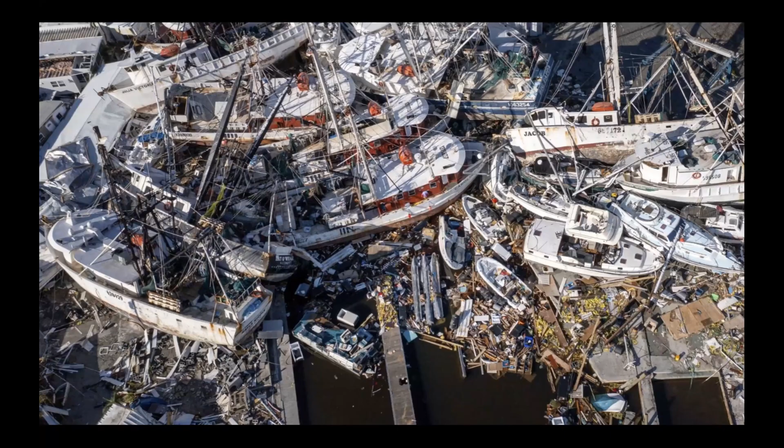If this moment were not so fraught, we might say it's ironic that the age of information coincides with the age of post-truth. Today, we feel politically more and more divided, and we've collectively witnessed the fragility of our institutions, the fragility of democracy, alongside the resiliency of violence and hate. We've also seen the erosion of women's rights nationally and human rights internationally. And in this deep social, economic, and political set of questions of our time, we're also in the midst of a climate catastrophe.

So the planet is so fragile and vulnerable. It's burning quite literally, and especially you are all aware in this area. So what can we as designers do amidst these daunting layered challenges? I think of architects as stewards of the built environment. And so we're asking ourselves as architects, how do we have agency? How do we collectively take action to build a better world?

So this is Charles and Ray Eames, and they were once asked to define design. And Charles responded in a Q&A when asked, is design an expression of art? He responded, no, it's an expression of purpose. When asked if design was a method of expression, he actually responded, no, it's a method of action. And when asked, what are the boundaries of design? He asked back, what are the boundaries of problems?

So purpose, action, problems, and we have a lot of problems. So this is the kind of multi-layered, complex context, maybe often referred to as our contemporary wicked problems. So how can we reimagine architecture, both in education and practice, to prepare us for the future world? And so I'm going to use this lens of purpose, action, and problems to begin to think through this.

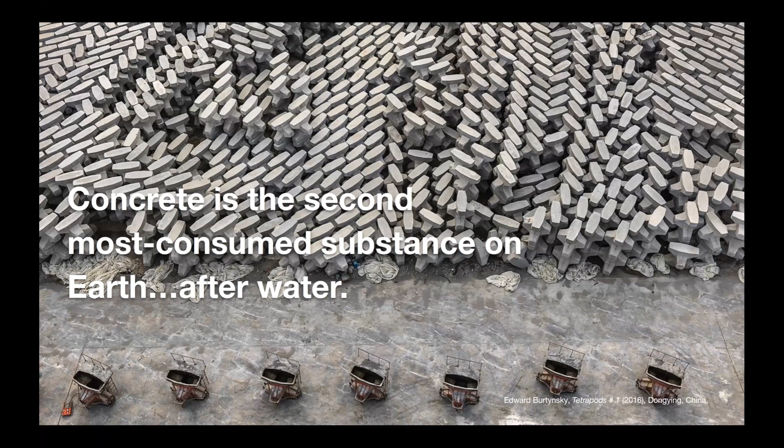So materials, right? We know architecture is highly material intensive and labor intensive. And if you look at the material spectrum, and you think of the volume of materials consumed, concrete is the second most consumed substance on Earth after water. It's also the most environmentally problematic of our building materials, but nothing has been able to replace concrete for foundations and other forms of construction.

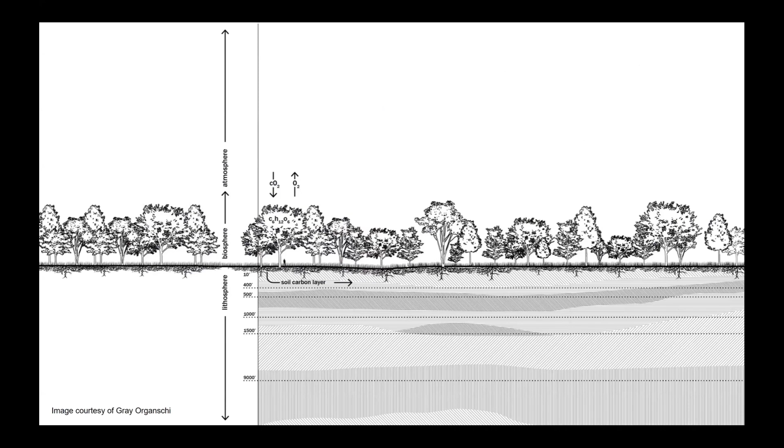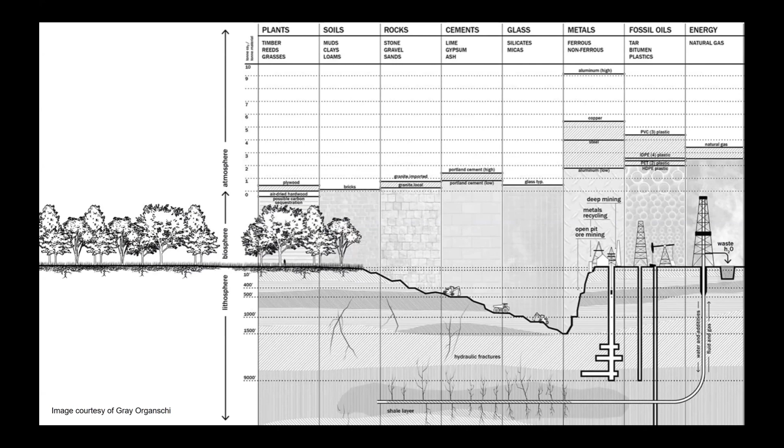especially with sustainable forestry practices. So we were asked to do a small installation at a site in Spokane, Washington. And one of the interesting things about this riverfront park was that it was the site of the World Expo in '74. And it was the first World Expo that really put forward the environmental awareness that was emerging in the late '60s and '70s.

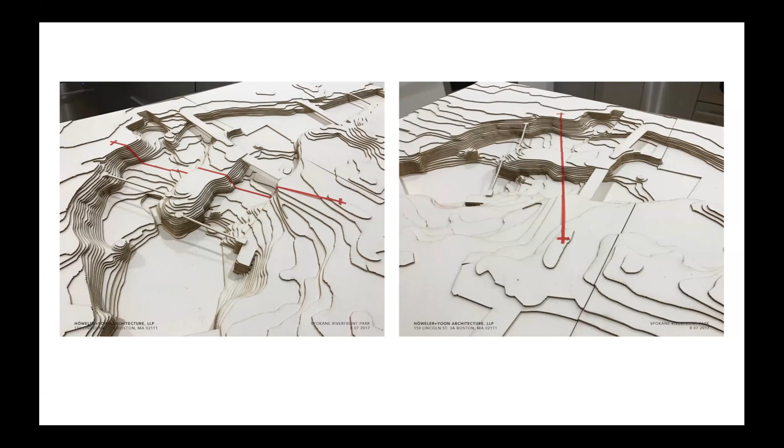So our project was simply to create a pavilion of sorts, interactive sculpture, and we used it as an opportunity to learn about mass timber. When we think about mass timber, we think about CLT and the industrial process of making cross-laminated timber panels, et cetera. But we really wanted to deal with the mass of mass timber.

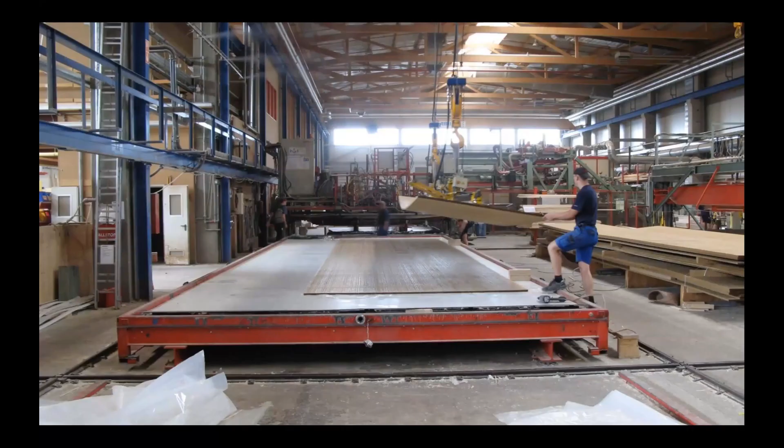So here you can see the woodworking history and legacy of the Pacific Northwest, and contemporary manufacturing with timber through these much more industrialized processes where things are in sheets. So we were thinking, where is the form, or what are the possibilities of the form of the mass timber? Thinking of it both from an analog perspective as well as from a robotic perspective.

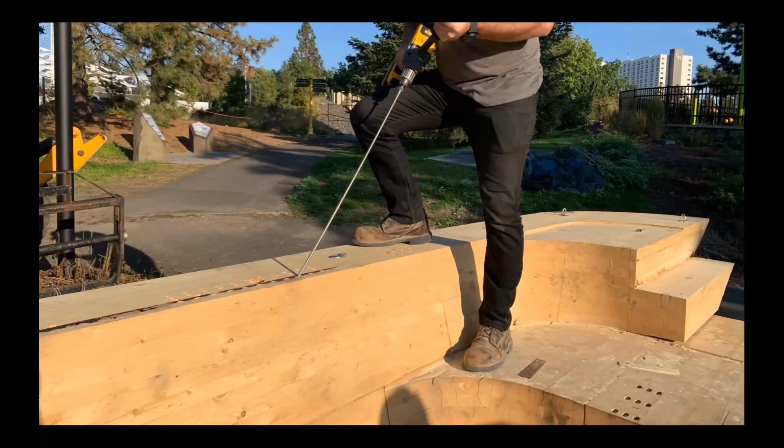And we designed a pavilion that could be simply a place to shelter one in public space that you would sit within and then get a view of this beautiful park. The screws are 23 inches long that go between the essentially glue laminated timber.

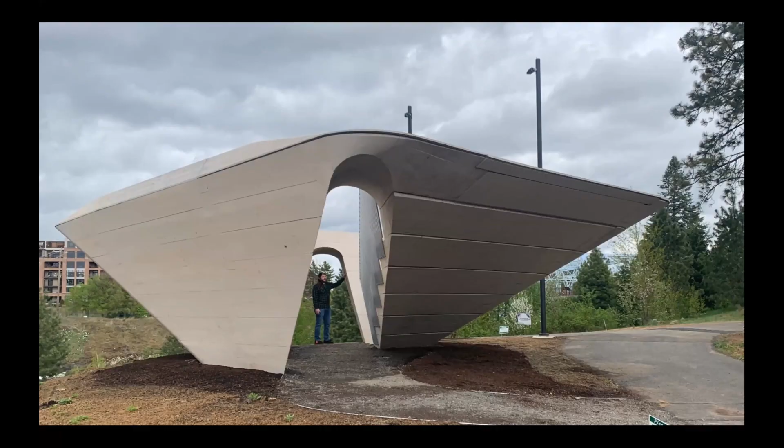And this is the structure, and we're testing the cantilever capacities of the wood, and also exploring the real beautiful qualities of the wood, like the checking, the things that everyone's always worried about, embracing that aspect of the wood. And so this just opened 3 days ago, and so I was there and enjoying watching people climbing the project.

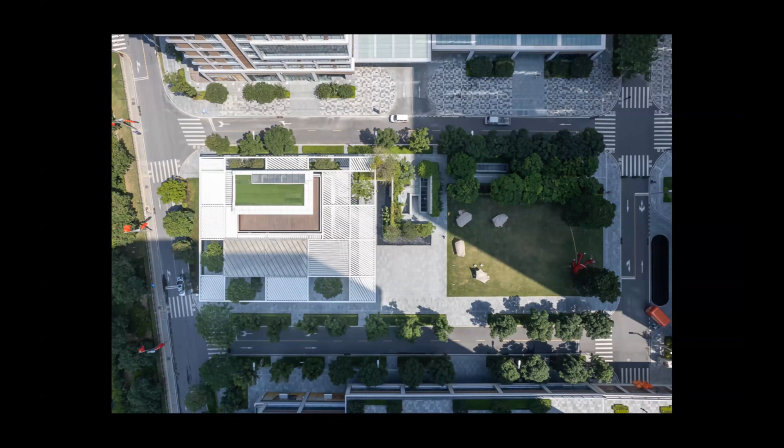So we've been thinking about materials in terms of the embodied carbon, right? So materials as a carbon sink. And so there's a focus now really on embodied energy; I would say we're coming out of a legacy that has been very focused on operational energy. So this is also a pavilion in a park, but a much more urban park.

It is located in Shenzhen, which is a very hot, humid climate. So you can see LA, Shenzhen, and Phoenix. And one of the ways that we wanted to create a public space and public amenity in this very hot urban context is by creating shade.

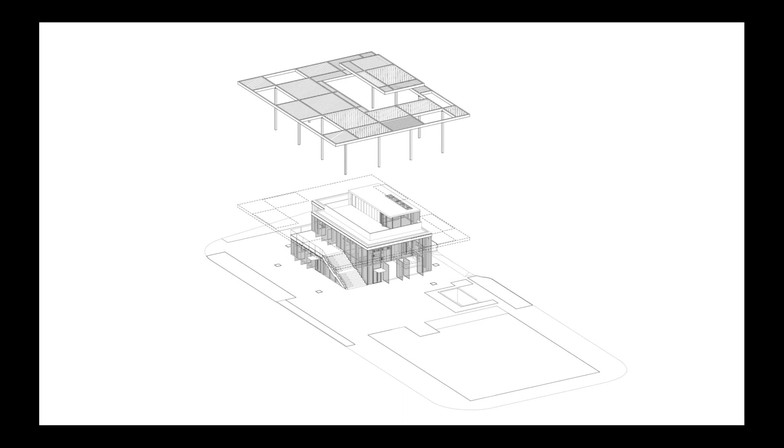So the concept of the project, because they wanted the pavilion structure to be very glassy in order to have transparency, so people were not afraid of using it, essentially a glass box. We decided that we would basically create this big shaded roof that would shade the glass box program.

But in looking at how to self-shade this building, one of the things we wanted to explore was, how do we design these louvers? One of our precedents was this beautiful building by Fisac, the Hydrographic Studies Center in Madrid, with these incredibly shaped louvers that really control light and bring in a kind of diffuse light while

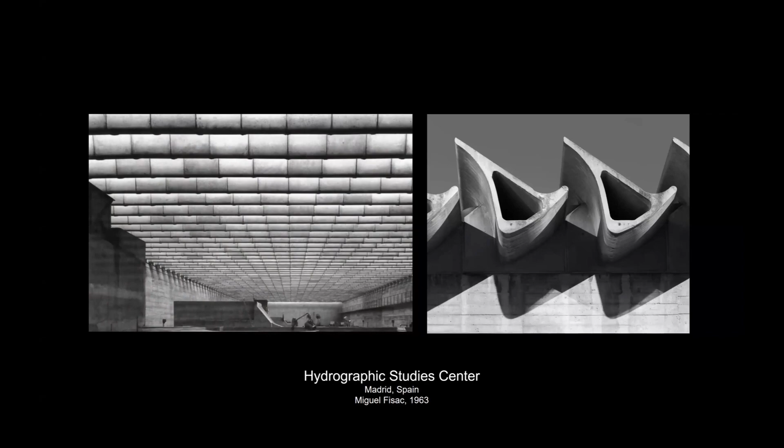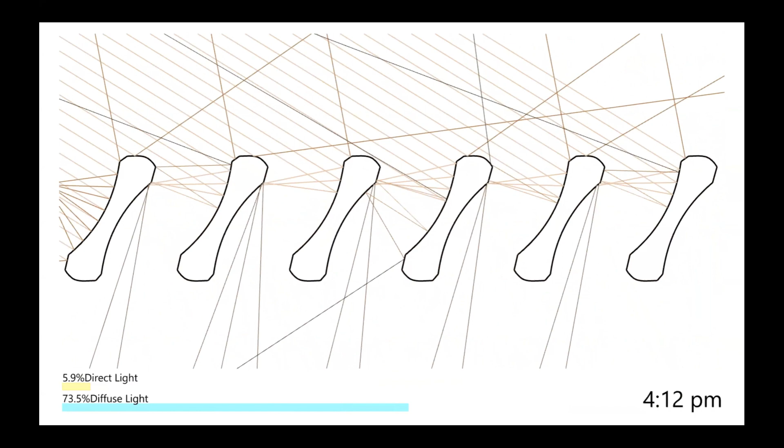blocking heat. So this is a set of studies where we're looking for a geometry that will maximize the amount of diffuse light and minimize the amount of direct light, so we can have as much light as possible without the heat. So through those studies, we developed a custom profile, which is in the lower right-hand corner, and then had a custom extrusion made.

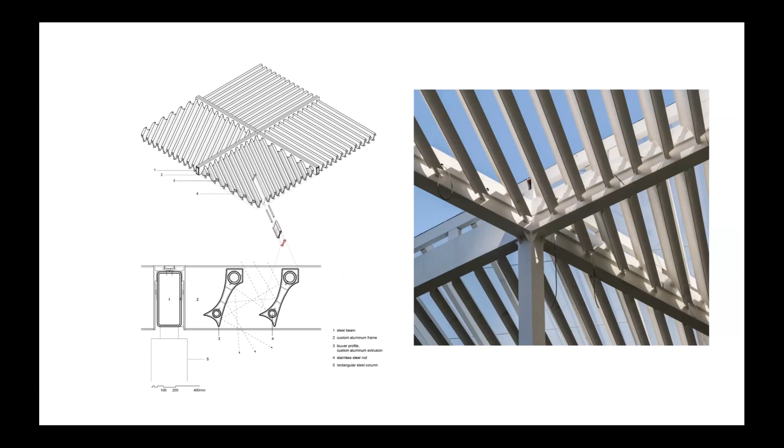So what I'm showing is the mistake. This is the first extrusion, which was totally wrong. But then they eventually got the extrusion right. And so this is the section of that extrusion. So those custom extrusions are positioned to create shade, and really do create this shaded outdoor space and a self-shading indoor pavilion.

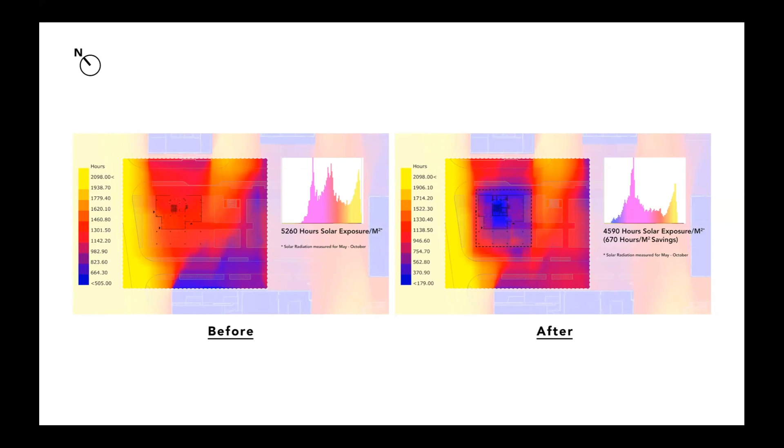And then this is the analysis of the before condition, if this pavilion or this structure had not had the shade, versus the after, and it's really well used both outdoors and indoors now. And I love that the best form of shade is actually the tree itself. So we made room to grow large trees through the canopy to contribute to that shading.

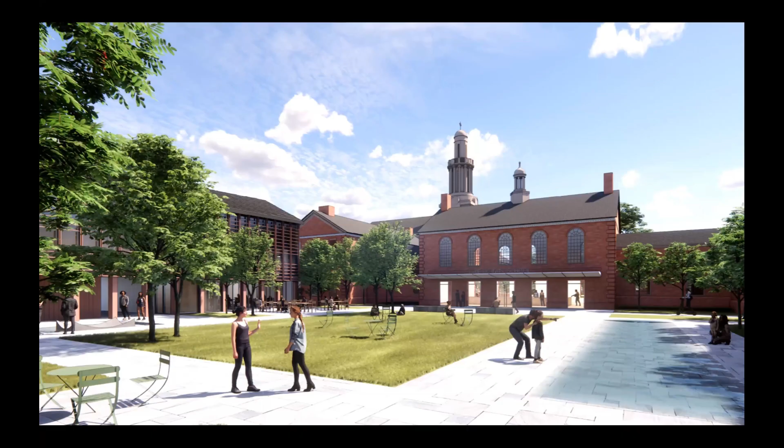So in the discipline of architecture, we talk a lot about sustainability. And we had an opportunity recently to work with Yale University on an incredible project because it's a Living Building Challenge project. A Living Building Challenge takes the normative elements of sustainability in terms of materials and energy and water, but it also adds these additional criteria of equity and beauty and placemaking, which is a much more holistic approach to thinking about sustainability.

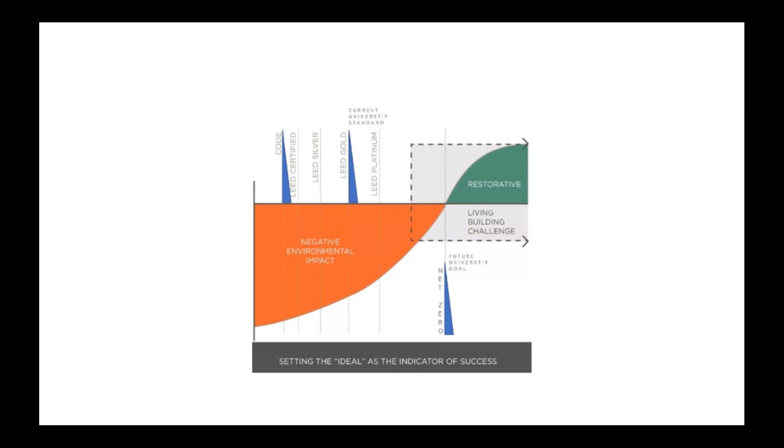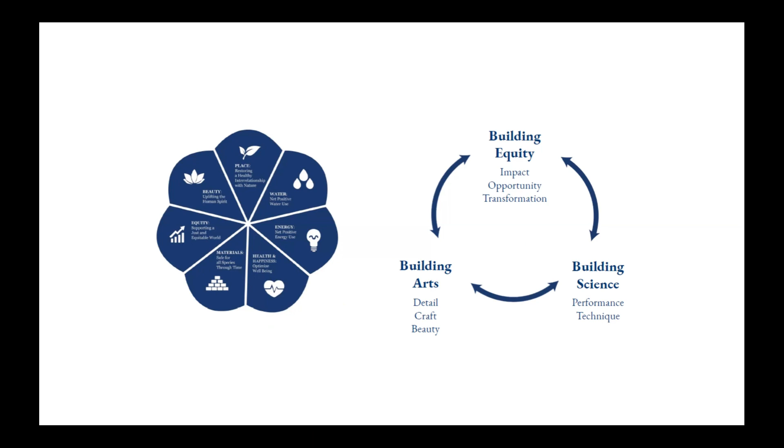So before we would think only about the negative environmental impacts and mitigating those negative environmental impacts. That was our definition of sustainability. But I think now beyond net zero, we're really thinking about net positive, thinking about restoring our environment. How can we build in a way that is much more restorative? And so one of the things we've been thinking about as a practice is not only building arts and building science, but building equity into that circular relationship and synthetic relationship to architecture.

I think with this Living Building Challenge commitment, there are not that many projects that are able to meet those criteria. But it was amazing to have the opportunity to work with Yale, which prioritized this Living Building Challenge of building equity and having additional criteria beyond just net zero. The project is the creation of additional residential units for the Divinity School. It's a very historic campus, the Divinity School, and our addition is this U-shaped residence hall.

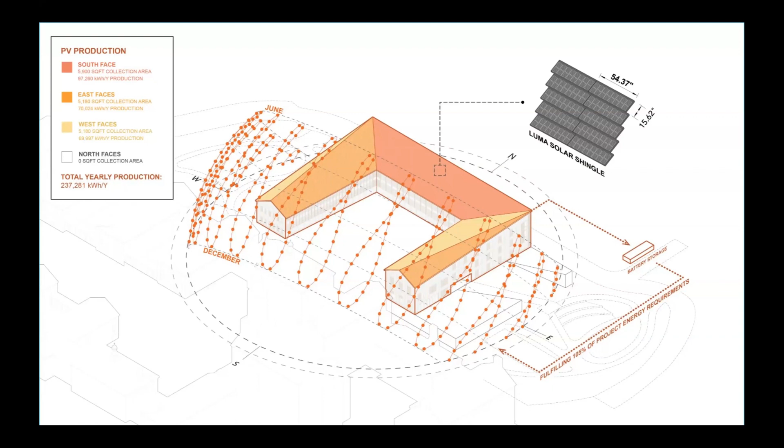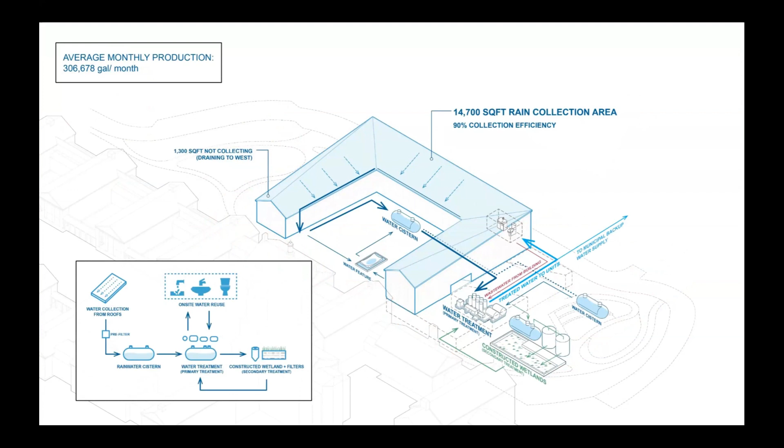But part of the design was really maximizing the solar production, and so that informed the geometry of the roof. Also, thinking about rainwater collection and its efficiency and treating the water on site. And then, of course, using cross-laminated timber as a sustainable material, and really thinking about the envelope enclosure to maximize the performance of the building. So we're able to reduce the total energy consumption by 70%.

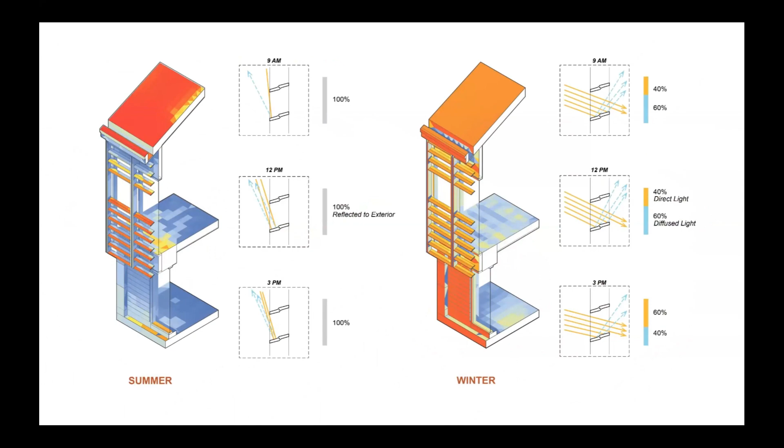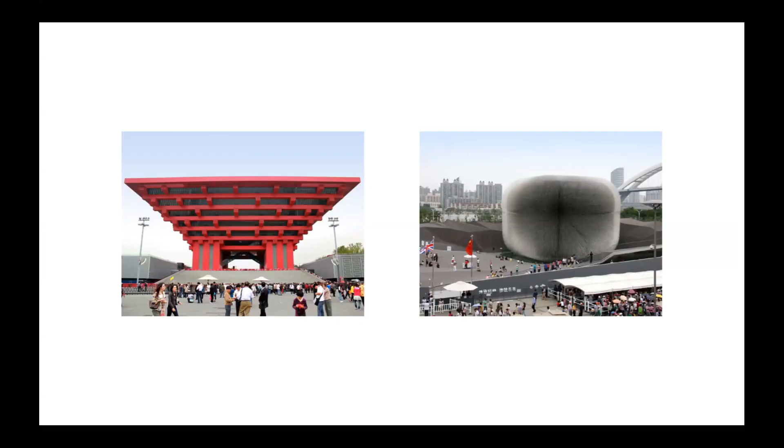Also thinking about restorative architecture at a much more urban scale. In 2010, there was a large expo in Shanghai, and it was on the periphery of the center of Shanghai in a formerly industrial area. And this expo had giant pavilions. It's a Heatherwick pavilion on the right.

And this expo took a lot of expenditure. Many architects built structures that would last all of a few months. And then the expo was over, and this industrial site was littered with these mega architectural pavilions.

It's taken a while, but just 2 years ago, there's a plan to restore this whole industrial site and turn it into a park that would actually bring trees and landscape and water and be like similar to Central Park for the Shanghai urban area. So we were asked to compete in a competition for those two little red bridges as part of this giant park. But we are the entry to this park.

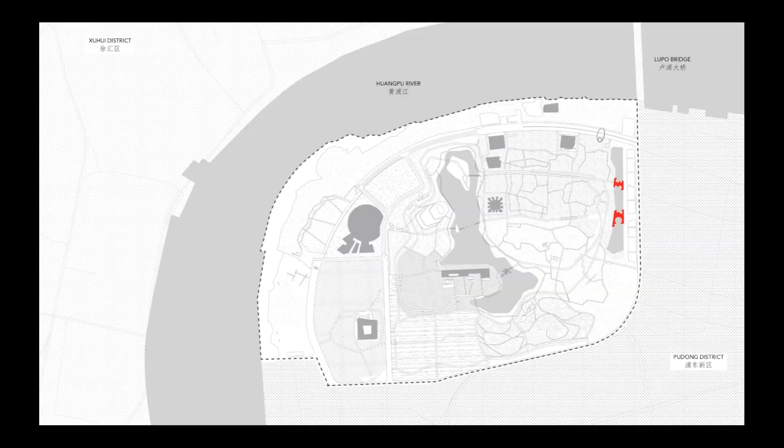And one of the things we thought about was the kind of difference in how we think about a bridge. If you think about a bridge infrastructurally, it needs to connect point A and point B. But here in the Chinese garden, the bridge is part of the landscape, and it meanders and it frames and it creates views. And it's not the most efficient way to get from point A to point B.

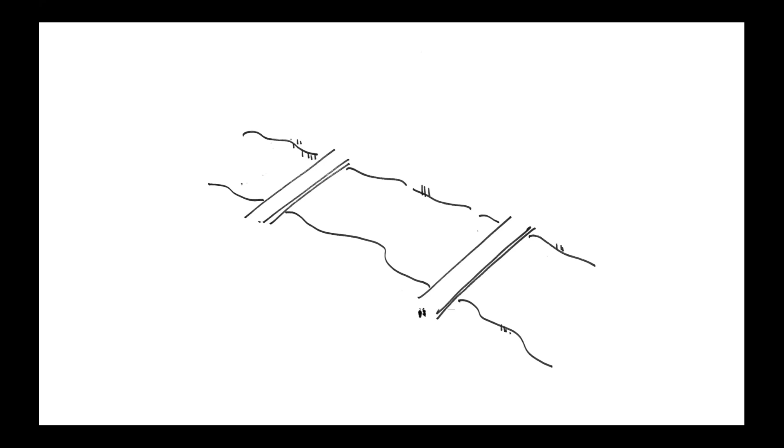So there are two bridges. They needed to allow for ambulances to drive, but they were primarily pedestrian. And we thought instead of two bridges, what we should really do is make one plaza with a big hole cut out of it for the water. So instead of being a bridge that's long, it's actually a bridge that's very wide and a public space.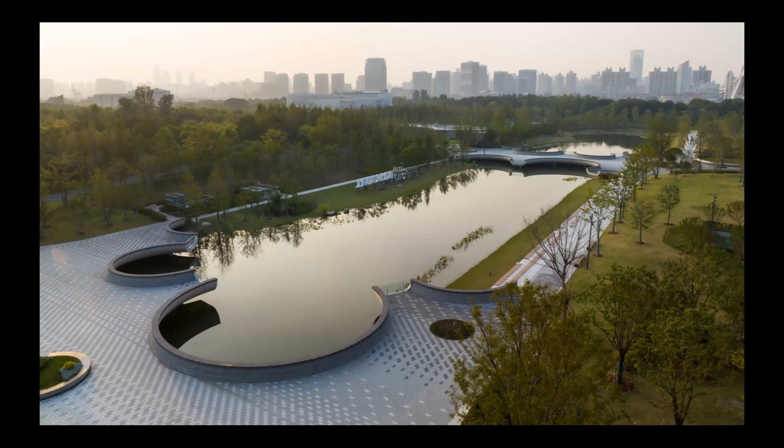And on one hand, it's interesting to see the scale of it, but so disappointing that there's no people on this bridge. But it was during the lockdowns where you couldn't even walk in this incredible newly constructed park. But since then, things have changed and there's a lot more, of course, activity.

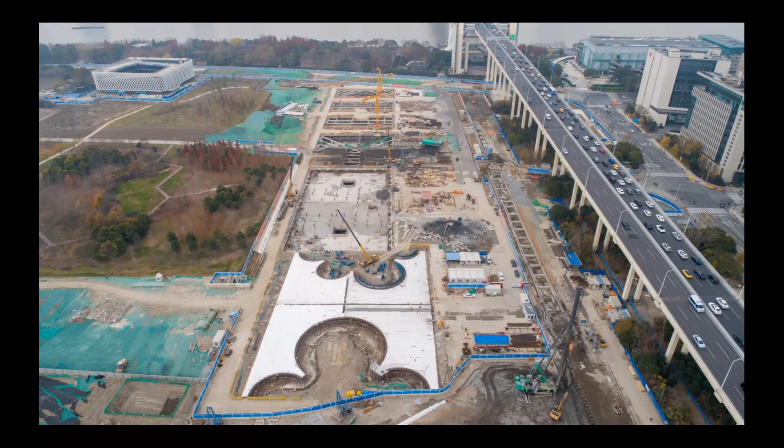This gives you a sense of that kind of scale and that industrial landscape where they've removed many of the giant architectural pavilions. The real infrastructural bridge on the right, the geometry of the bridge has a kind of double curvature that really softens the way the water and the light reflect off the underbelly of the bridge and give it a kind of lightness.

And then it has these little snouts, which are these balconies that allow you not to cross the bridge, but to take a pause and peer out and be really part of that landscape. And this is from one bridge to the other bridge. And one of the things we often do is really think of the material context of what makes the architecture. So we use local granite here.

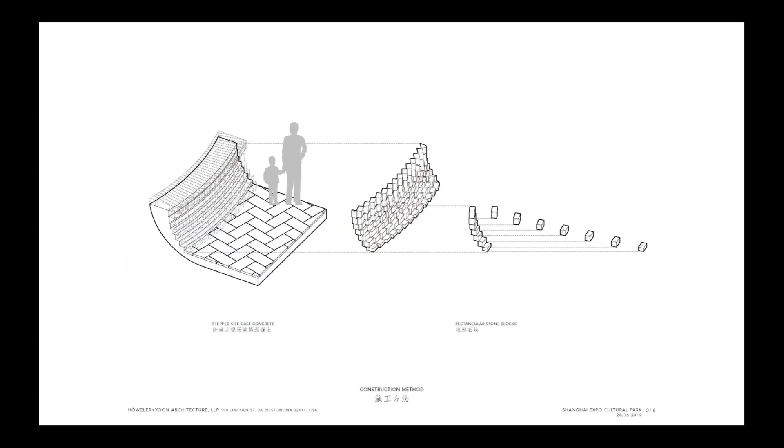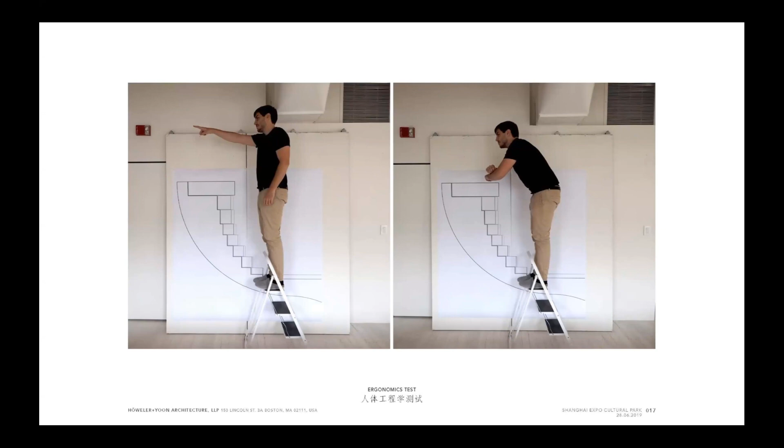And then this is us in our studio really testing the scale by printing out full scale drawings to understand the ergonomics and the tactility and the human scale of all of these projects. This is one of my favorite photographs of the project.

I also think when you build with materials, you have to really think both globally and locally simultaneously. As Zach was saying, we can now build anything anywhere from any material, and other than the supply chain challenges of the pandemic, truly you could source material anywhere and everywhere, but that sourcing comes with an energy footprint, both in the manufacturing of the material, but then the shipping, etc.

This is a project in Chengdu, China, where we work with really local materials and local trades. So this is made out of Chinese brick. And the idea was just a courtyard house packed together that would allow light deep into a very fat footprint because it's an exhibition hall, and then ways to cellularly break that down.

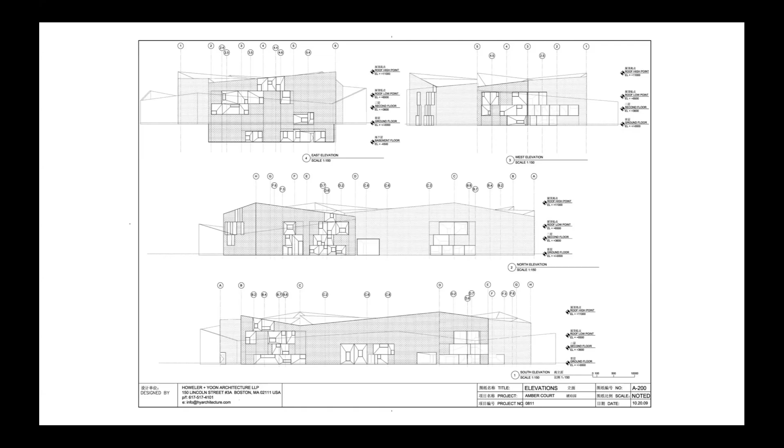The windows were pretty small and operable, and so we needed to create these giant window surrounds to mediate the scale. But I think what's interesting is people often say, oh, did it rain? Why is the brick darker at the top? Was that designed? And this was not designed. It's just the natural output of the making of these bricks over the time span of constructing the building.

And so over that time, the brick manufacturing just got darker. And so you're seeing the kind of darker color bricks at the time. It's kind of an accident, which is quite lovely about the material imprint that a building holds and carries.

The other thing is we designed these surrounds as wood. And then we were told wood is extraordinarily expensive in this region. Could you change the material to Corten steel, which self-protects, and we did.

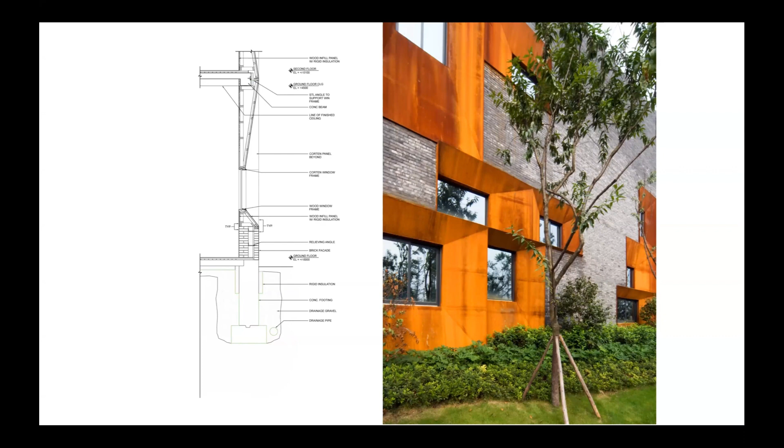So there are these lessons where you learn that something very sustainable in one context is not sustainable in another context. And then we were very excited to work with the local masons and the local brick, which is this kind of cool gray brick.

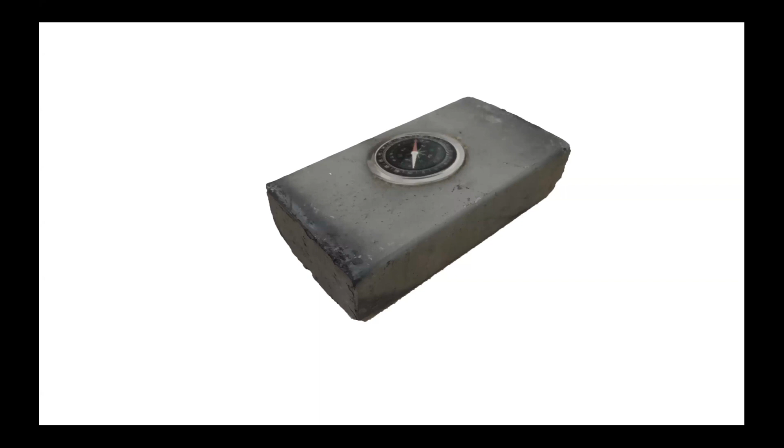And one of the things we thought of was, could we give the brick a rule, like an orientation? So all bricks have to face true east-west or north-south. And then on the oblique angles of the building, they still face true north-south and east-west, which gives it a feathering texture. And this came out of just wanting a very simple rule, as opposed to drawing a million drawings, that all bricks face east-west or north-south, no matter what the geometry is. So on the oblique angles, you get this incredible texture.

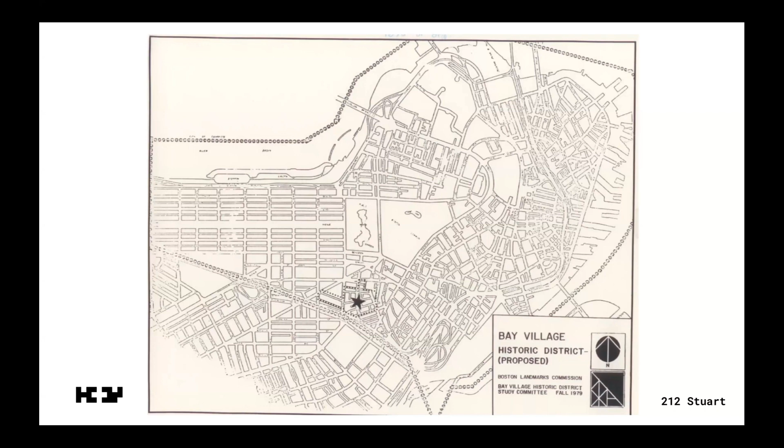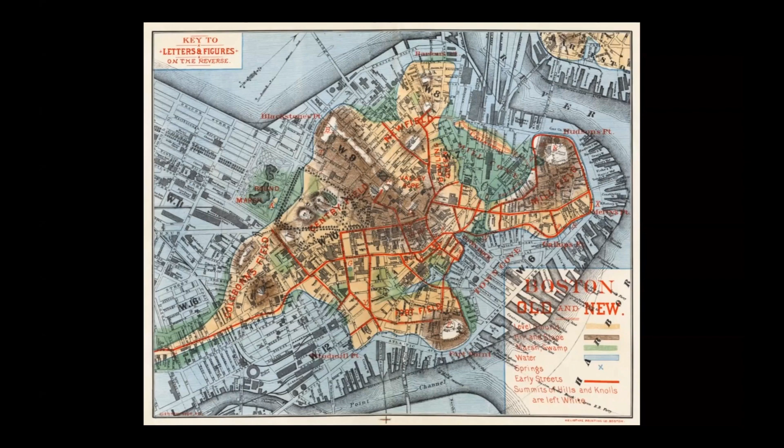So we are practicing in Boston. And the interesting thing about Boston is it's a highly constructed city. The project I'm going to share is in this cute little neighborhood called Bay Village, which is a historic district very close to that large open area, which is the Boston Common and Boston Gardens. If you look at Boston, though, everything blue is infill. It's like artificial land. Boston itself, had it not filled in the land, would be just a tiny, almost island connected by a tail.

So this building sits between what is called the high spine of Boston and this cute, tiny Bay Village, where the buildings are just 2-3 stories tall, townhouse typology. And the site, interestingly, was underdeveloped for a very long time, because it was undevelopable or did not make sense to develop because it was too small. It's about 7,000 square feet total. So it existed in this incredibly dense Boston area as a parking lot for 20 cars for many decades. And those are the cute little 2-story townhouses of the Bay Village neighborhood.

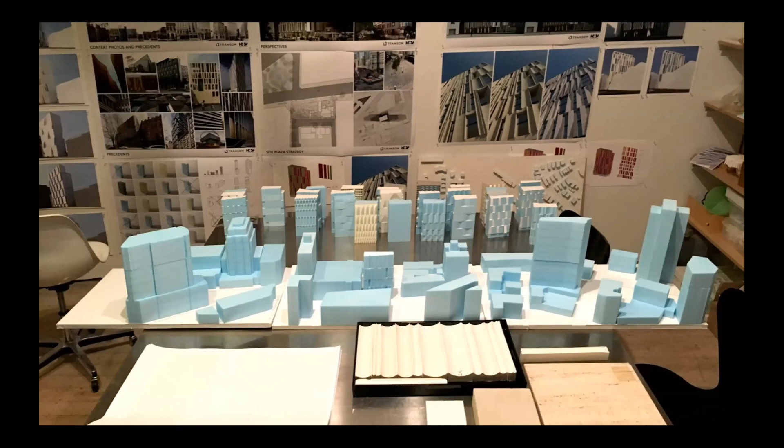So we were contacted by the developer and asked, could we design a building that could really mediate the scale, that the neighbors would enjoy and welcome versus protest, and still pencil out for the developer, filling in this missing tooth in the city. So we did this kind of inventory, because many of the new towers, 20-story buildings, tend to be thinner in material, curtain wall, lots of glass.

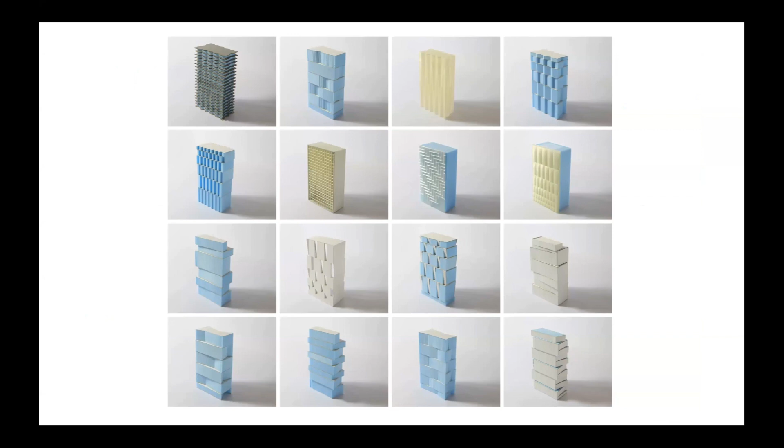But we did an inventory of the materials in the neighborhood, and we thought about how do we break up the scale of the building, because it's 20 stories, but how do we make it more human in scale? And we did a set of studies that tried to keep breaking up the mass. We also learned from that inventory of the materials in the neighborhood that range from brick to limestone to fluted columns and this kind of rich texture.

So we cast a series of flutes out of plaster one day, and we're saying, could we create a kind of thickness that has the qualities of some of these historic materials used in the neighborhood, give it light and shadow. Then we milled that out of limestone to get this kind of fluted quality. This was one of our first concept models. This was the first rendering.

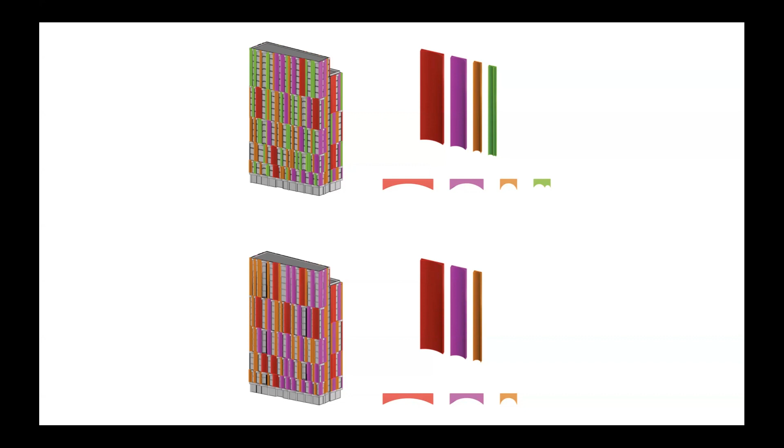And then we thought, well, maybe we could accomplish this by creating a series of 3 or 4 molds. We thought the molds were going to be really expensive, so we started to limit our thinking: fewer molds, more affordable, more possible. But then we learned we can make as many molds as we want. The cost was really driven by the crane, the time the crane would be on site. So what we learned is the most efficient thing we could do is multi-story precast panels, so that we minimize the number of picks the crane needs in order to assemble the building.

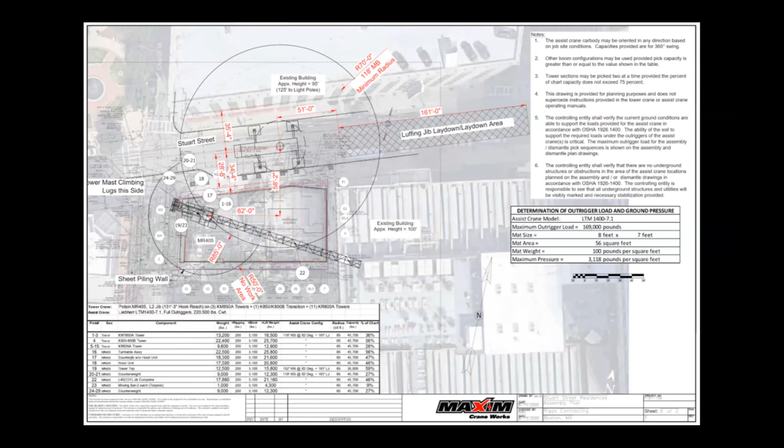So we worked with a local precast manufacturer on designing these multi-story panels. They're literally just a few miles from Boston, to work with these kinds of geometries. And then you can see the multi-story panels going up on site.

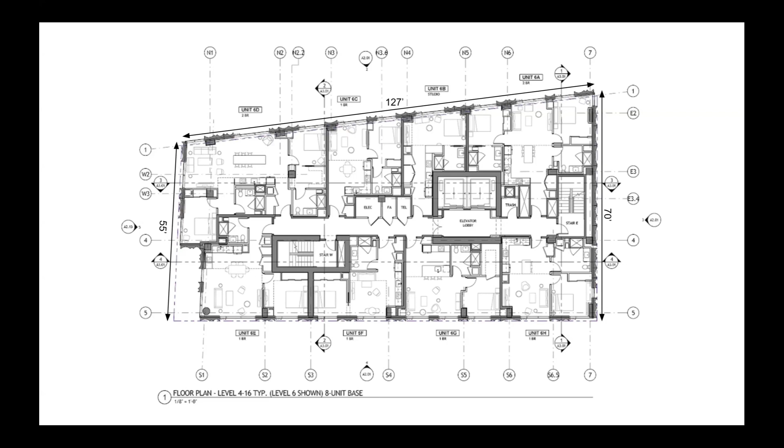And there are only 8 units per floor, because it's such a tiny, tiny footprint. But the other thing about Boston is there's a 17% affordability requirement for every new multifamily residential construction. And so there's an encouragement that it's more than 17%. So many developers are doing 20% affordable.

But one thing that I love about this project was not intended, but actually came out of a negotiation with the neighbors and made the project much better. So you can see there's no room for loading, and loading's so important. We originally had the loading and the mechanical on the back side of the building, which is Shawmut Street, which faced these cute little townhouses. And so we were a very bad neighbor.

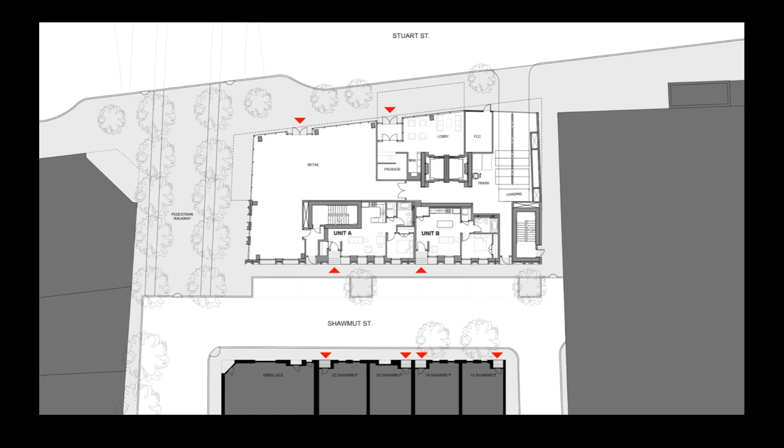And what we heard from the neighbors is they didn't want the loading and the back of the building to be the back. They wanted the back to be the front, which made total sense. So the innovation was actually to create 2 townhouses that would have stoops and front porches that would also face Shawmut Street. So it's a very interesting unit because it's a duplex. So you can get at it from an elevator from the lobby on the main street or the stoop front door on Shawmut Street. So these are some of the more recent photographs, just recently completed.

And the contrast, I love the Hancock building. Beautiful building, all glass, but I think we also need to think about building in ways that are not all glass. We're also thinking a lot about the neighborhood in the city and neighborhood institutions. I think we all saw a lot of things lost during the pandemic. A lot of favorite restaurants closed down.

One of the favorite institutions in this area called Brookline in Boston is the Coolidge Corner movie theater. It's an Art Deco theater, plays kind of films that are more small scale. It's not a big blockbuster kind of venue. And the Coolidge has thrived in this funky Art Deco building for many years, and it's actually outgrown its space. So we were asked, I guess we're like the backside architects, we were asked to do an addition on the backside of this building.

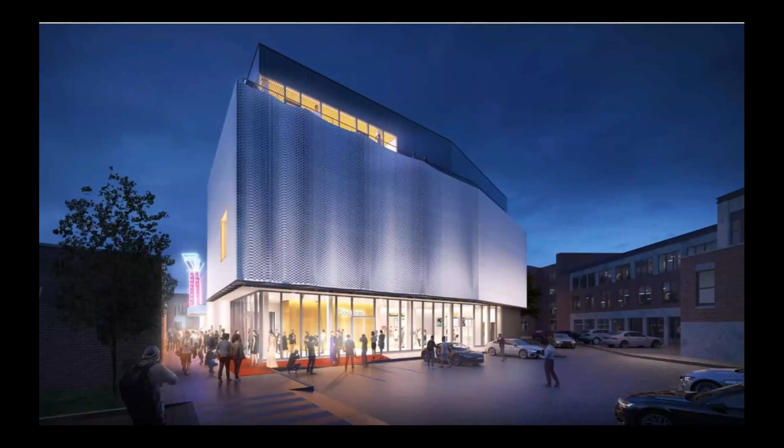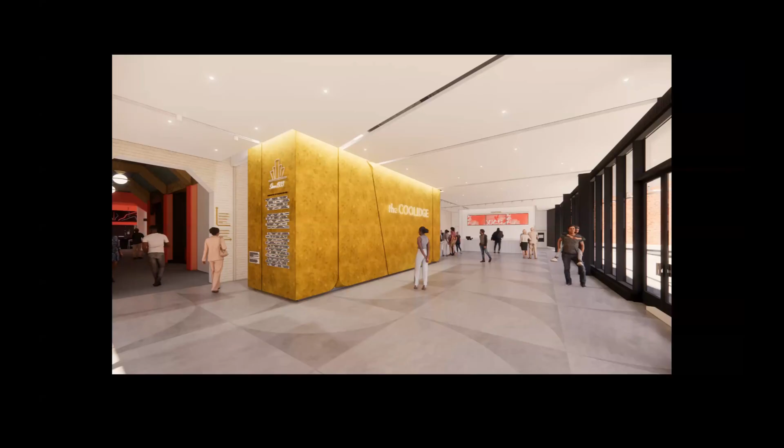So this is the entry. So the backside becomes the new lobby and ticketing, and we wanted to make sure it creates a very good connection to the historic deco part, which is on your left. Then there's a theater on the next floor, and we wanted each theater to be a super intense color. So there's a red theater, and then if you go up, there's a blue theater, and then there's a nice community room with a roof terrace, not dissimilar from here, but without the beautiful, beautiful lake.

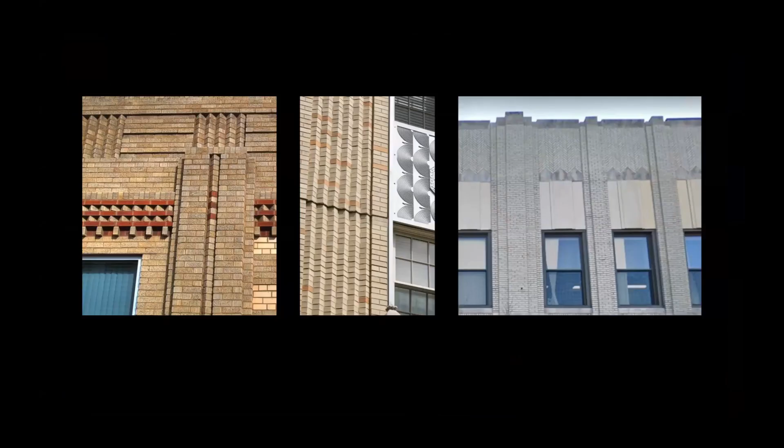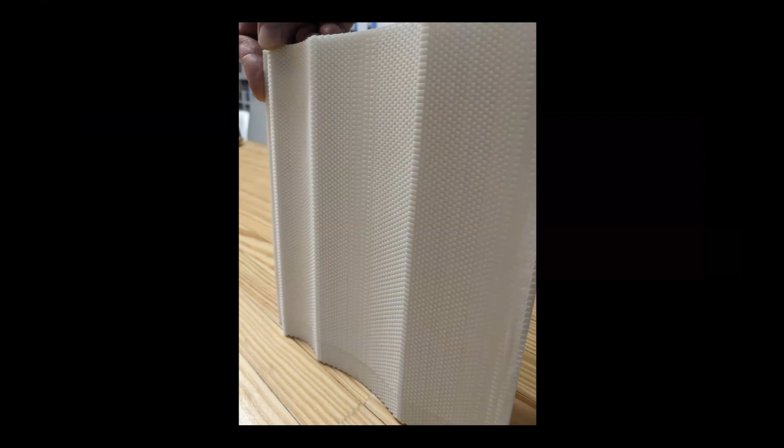But one of the questions that the Coolidge Corner Theater asked us is, how do you do Art Deco today? And how would you translate Art Deco? Art Deco is amazing. Such beautiful tactility to the way they would use the bricks and materials, the celebration of a kind of human scaled technology. So we developed an idea around a facade that would use the same kind of bricks as used in the front of the Coolidge Corner, but undulate them almost like a large curtain.

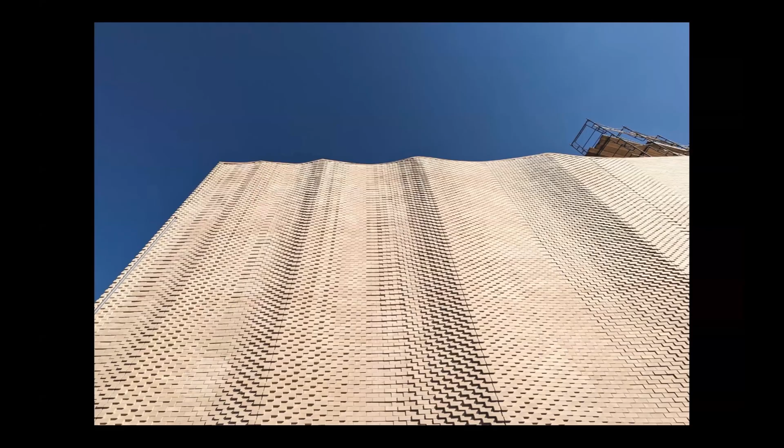And then this is a recent construction shot of that brickwork. And these are all hand-laid bricks by amazing masons. And this gives you a sense of that texture. And this should be finished construction in 2 months, 3 months, they say. Looks like it needs a few more months, though.

And that tragedy was not contained. It impacted the whole city, the victims of that bombing, their lives, their families, but it also extended out to MIT's campus and Cambridge and Watertown. So when the Tsarnaev brothers were hiding and running, they ran through MIT, and I was a faculty member at MIT at the time. And when they were on the MIT campus, they shot and killed a very young campus police officer named Sean Collier.

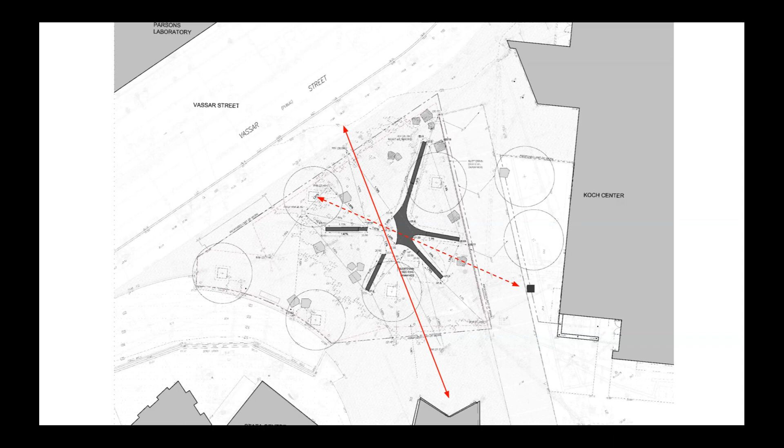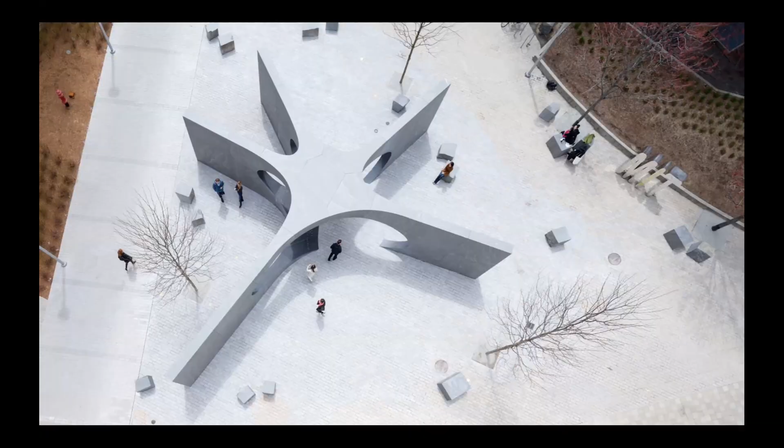So this memorial is a 5-pointed figure, which has a hole carved out of it, like an absence or a boolean, and that boulder or shape is kind of removed. That makes the 5-pointed figure not an obstruction, but something you could pass through and be sheltered under. This is the memorial from above.

But it also kind of became a research project in a very MIT way that came out of the concept that strength is not brute force, but strength actually comes from many individual things sharing the burden or sharing the load. So the idea of the arch, where every brick supports the other brick, and the research around how to build such a compressive structure. So really you could see the memorial not only as a 5-pointed figure, but actually 5 half arches that are leaning into each other and supporting each other.

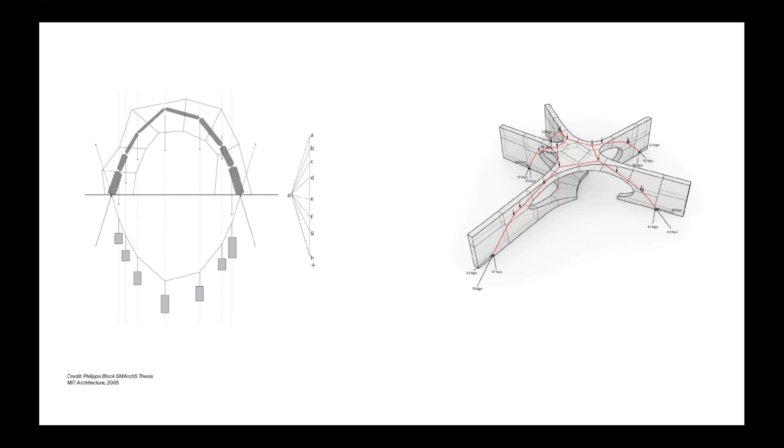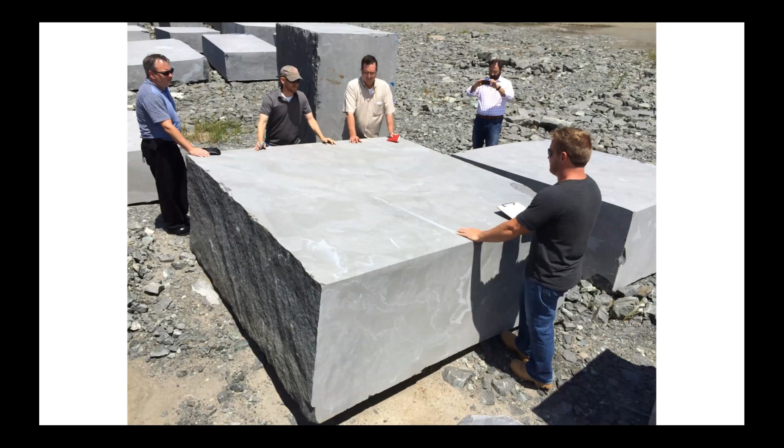You could also see it as a kind of shallow dome made out of 33 unique blocks of solid granite that support each other purely through physics and geometry. So there is this 140-ton mass above you of solid stone suspended in air through physics and geometry. The center block would be the pin that would hold this all together. Just get a sense of the scale of it.

And what was really important about this is that it is theoretically possible to build this as a fully compressive structure, but if it's 1/16 of an inch off, it could fail. Or if it's 1/2 inch off in the joint, the top could fall. So it had to be perfect. So, we're at MIT, we have tons of robots and tools. We're like, it can be perfect. We can model it perfectly in the computer and it can be fabricated by robots perfectly.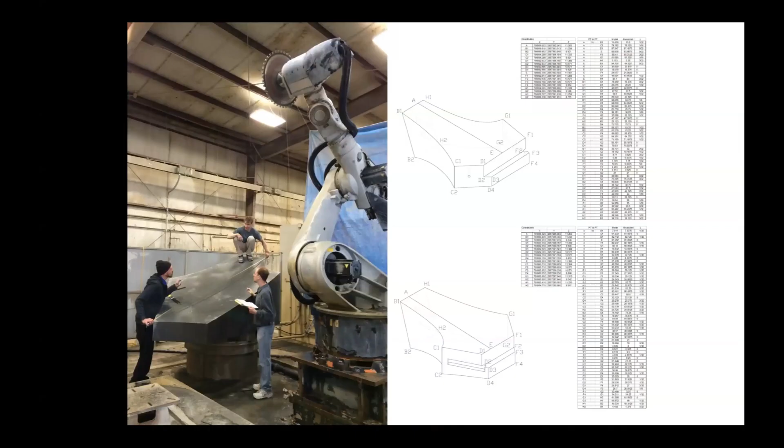And then our fabricator said, but the wearing of the saw against the stone when you're sawing it is creating something you cannot calculate, because the diameter of the saw is shrinking while it's carving those massive blocks of stone. So we're like, well.

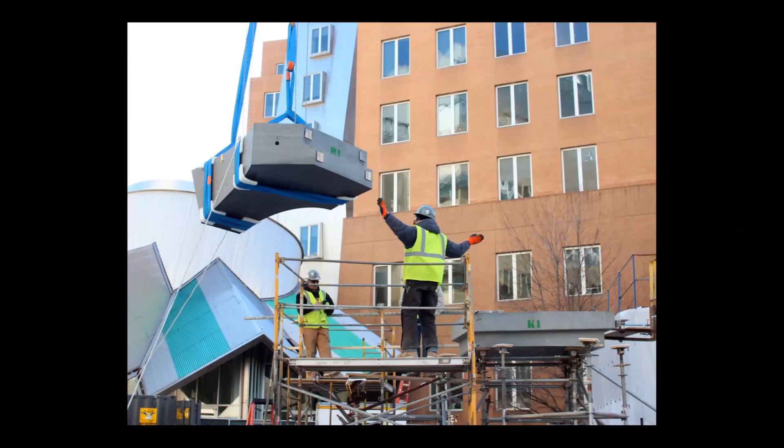So what we did was, as we fabricated each block, it was measured, it was scanned, and then we would adjust the 3D model of the next block so that it would be a perfect fit. And we did this for every single block, and 3 blocks at a time would come essentially to MIT on

a truck. The other thing we did was, because it was a test, it was a theory. It was not provable because no one has done it before. So we had to build it so it was provable that this could work fully in compression. So we built the vault backwards, essentially, and we built it on scaffolds from the center out, so we could shed any tolerance difference outward into the legs.

We also inserted a series of stainless steel pins in the critical areas where the engineers had concern. But we had the ability to not put the pins into action if we did not want to. So the pins are there, but they only go into action when you pour in the grout.

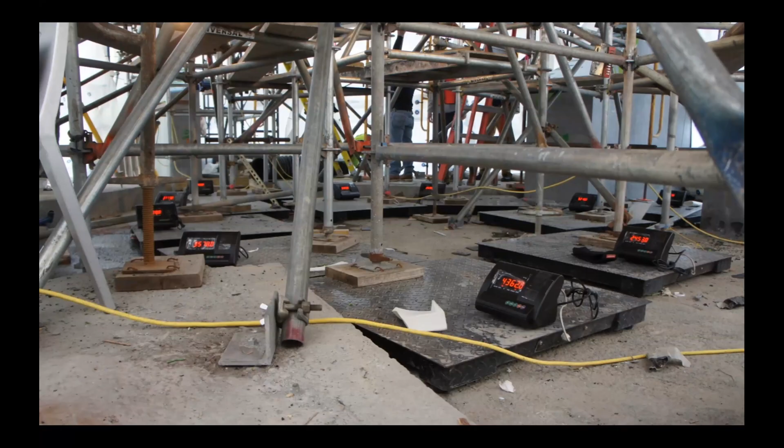So we put strain gauges at every joint. We put that scaffold on these mega scales that were measuring the tonnage of weight supported. And then at the top, we slowly released the scaffold, 1/2 turn at a time, so 1 millimeter at a time, while measuring what the scales were saying.

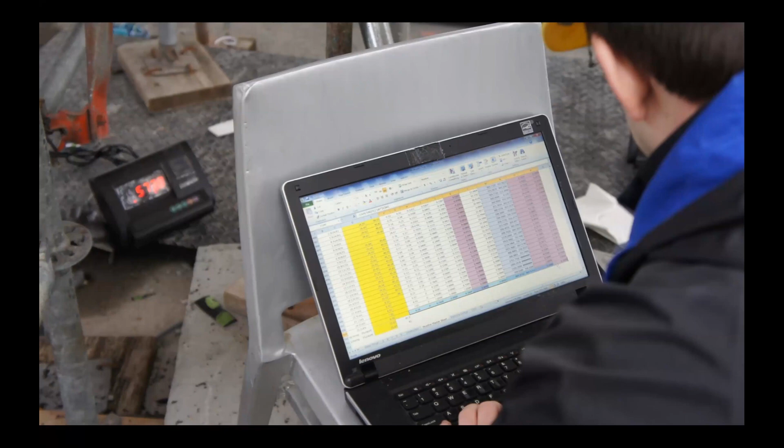And this happened over 5 hours of incremental lowering of the scaffolds so that the weight of the blocks would transfer from one block to the next block to the next block as slowly as possible, so that we wouldn't get a shift in any of the stone, which would create a severe problem. And we were successful.

This is our amazing crew. And I think one of the really amazing special moments is the gentleman that's not wearing a vest. His name is Rob, and he is the brother of Sean Collier. And he was the project manager for this project. So this project was something that was very special and above and beyond, I think, for everyone who worked on it.

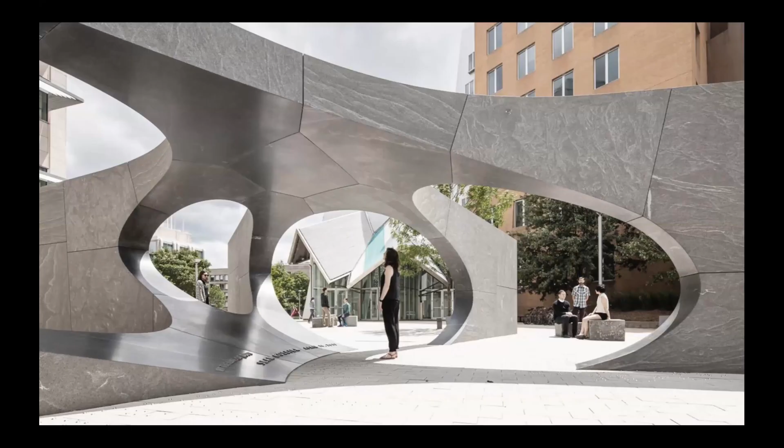But the other thing the memorial does is it frames these incredible views. When you're under this dome, it feels very protected and quiet and somber. But when you're around, you feel like this is part of your environment, and it becomes like a series of rock gardens. And when you're further out, you understand this memorial and the sacrifice and the loss and the absence of Sean Collier.

The last project I'm going to share is the Memorial to Enslaved Laborers at UVA. And for me, it helps me think about the role of the institution, like the role of UVA, the role of Stanford, the role of Yale, the role of MIT, the role of Cornell in building a better future.

So we all know Thomas Jefferson, third president of the United States, signer of the Declaration of Independence, founder of the University of Virginia, also called the architect of the University of Virginia, and the owner of 600 enslaved people in his lifetime. If you look at the signage around the history of the University of Virginia, until very recently, there was no mention anywhere of the enslaved people who built and maintained the university.

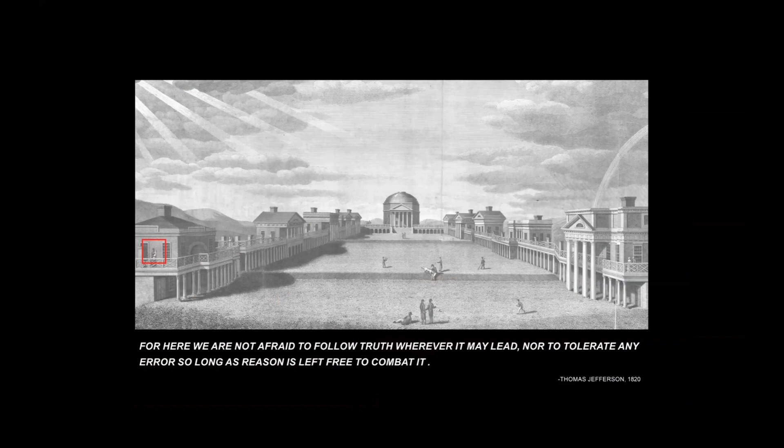Then the university uncovered these unmarked graves of the enslaved, and the president formed an official commission on slavery and the university that was comprised of faculty and experts, historians, and students. So this is one of the oldest prints. It's a Tanner Böÿe print. And if you look in the corner, you will find the first representation of an enslaved person caring for a

child. If you look around the campus, you might even find bricks with the imprint, the fingerprint of the enslaved young boys who made each of these bricks by hand. This one is from Monticello. And then if you look at the architecture of the campus, you will see the beautiful historic lawn with the rotunda terminating it.

But you'll see the pavilions have an interesting section where it has a kind of walkout lower level, which were the yards, the work yards, where the enslaved did backbreaking labor to maintain the university.

So our team, we had an incredible team. Our design team included historian and designer, architect Mabel Wilson, Frank Dukes, who started UCARE, whose area of expertise is environment and negotiation, landscape architect, which was critical, Gregg Bleam, and the artist Eto Otitigbe, along with myself and my partner, Eric. So we said in order to design this project, we really needed to design the process.

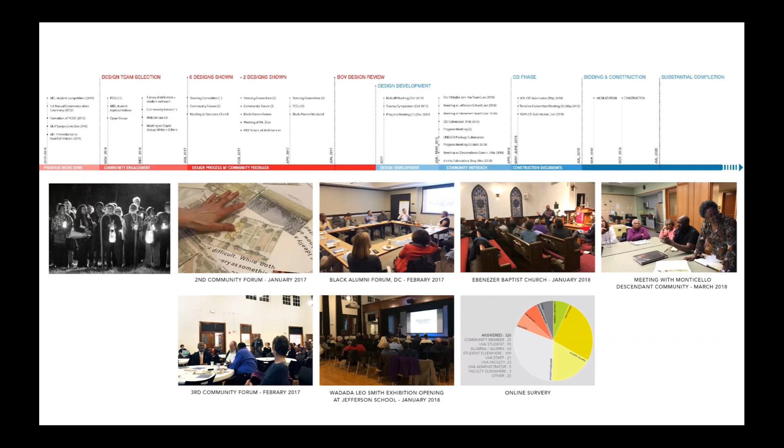So we had a 6-month engagement process. The university did not give us a site, did not give us a budget, very unusual. We had to find the site. We had to explore with the community where the right place was for the memorial. So we explored multiple sites.

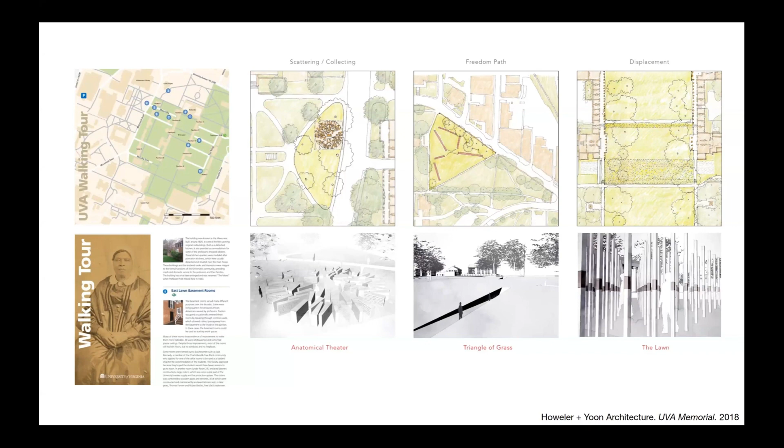And then what was important about this 6-month process was it really allowed everyone to participate in the design process, because these would be these tests. We would visualize these tests, and then we would hear from the community what was working and what was not working. And we looked at sites on the lawn, and everything from very ephemeral proposals like planting crocus flowers in the green lawn and just letting them bloom once a year, to paths, to physical artifacts.

But what we heard from the community through the process was the memorial needed to be a space and a place for gathering, not only to recognize the painful history and honor the ancestors, but to also be a place and space for advancing racial justice today.

And I think this moment where everyone was gathered in a circle on the triangle of grass was really important. The idea of this ring shout, this ritualistic dance, have life and joy, and we heard that from the community and the descendant community as well, that it also needed to celebrate the resilience and the humanity of the enslaved, and not just the pain.

So the memorial is very simple in form. It frames a gathering space. It's made out of a series of rings. It's 80 feet in diameter, which is the same diameter as the rotunda, but instead of being solid and enclosed, it's actually conical in section and open to the sky and nestled into the landscape,

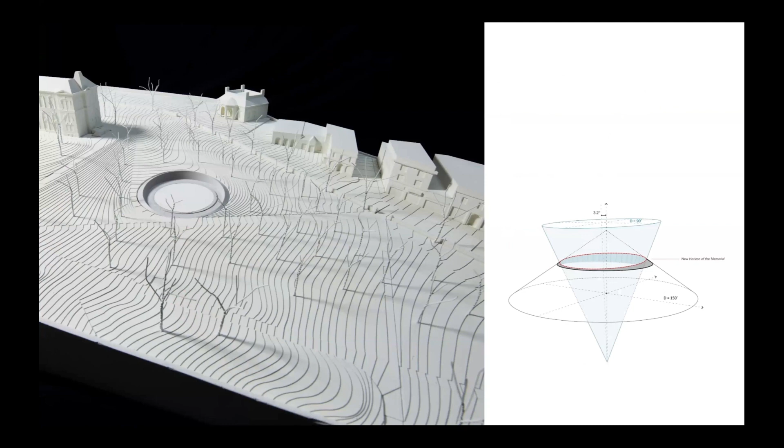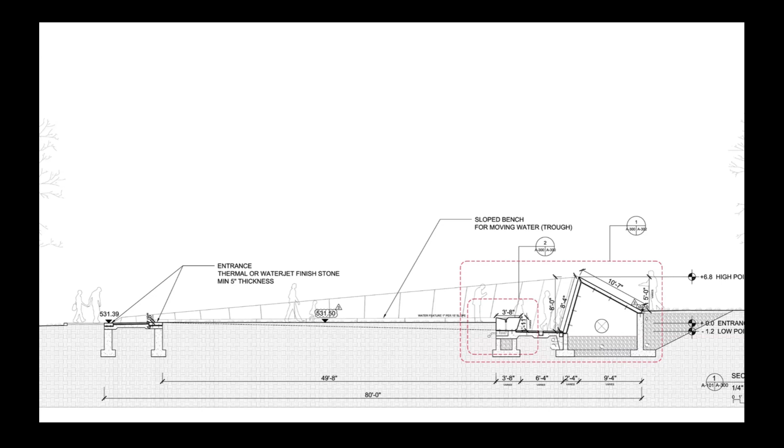so that it is very shallow when you enter. And then as you walk around it, because the ground slopes ever so slightly down and the wall moves ever so slightly up, at some point you lose the horizon line, and then you're kind of face to face with the inclined wall.

We draw lots of things at full scale to understand the kind of section. So this is when you're inside the memorial versus on the outside of the memorial, and being able to see above and across. So this is the ring. You can go clockwise or counterclockwise.

This shows the molded texture, the rough texture on the exterior versus the smooth texture on the interior. And this is something Eto Otitigbe really wanted, to create a material resonance with the gravestones of the period. And then also we heard from the community, they really wanted a form of representation of an enslaved person, an actual enslaved ancestor in the memorial.

So Isabella Gibbons was a matriarch. She was an enslaved woman who was freed and stayed in the community and became a teacher. She's also the only person we have a record of a first and last name, a photograph, and writing in her own words of her experience as an enslaved woman.

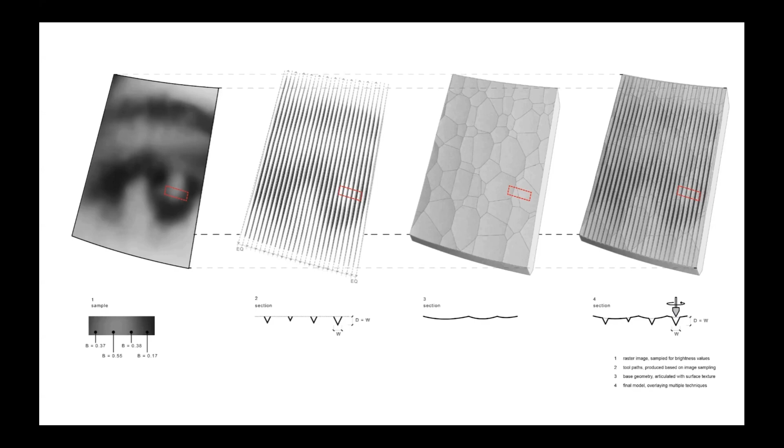So we wanted to carve her eyes at a colossal scale on the memorial, but in a way that you would only see it from a certain vantage point. So her eyes are like she's the watcher and the witness of this site.

The other challenge we had was, how do you acknowledge and honor approximately 4,000 enslaved people for whom you might not have their name? There might be records that are very meticulous about their labor, but not about their humanity. So we know out of the approximately 4,000 enslaved, only about 900 names were recorded, or individuals have some form of recording.

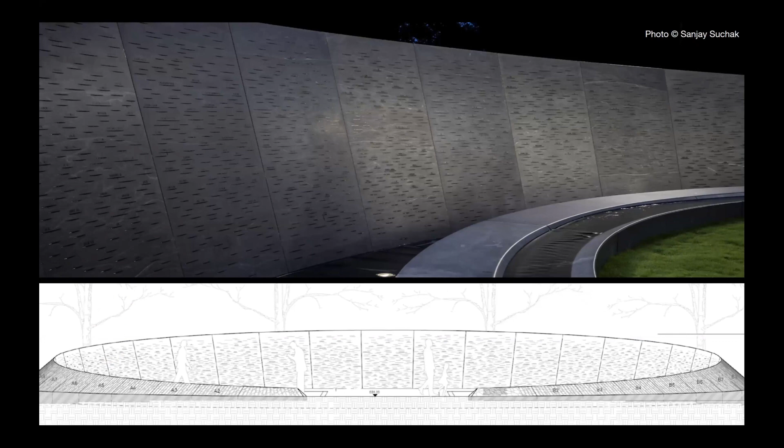577, a full or partial name, and many for whom we just have a kinship or an occupation. So we created what we call 4,000 memory marks into the granite. Those memory marks, when we have a name, we carve it above that memory mark. When we have an occupation or a skill or a kinship, we carve that in as well.

And then you can see these memory marks have a crescent kind of geometry that works in plan and section. So it cuts a little deeper, like a gash. And when it rains, it holds the water just a little bit longer so that the surface around dries faster than the water that's held in those cuts. And then those cry or bleed down the memorial.

And the most meaningful part of this project was getting to know the descendants who took real ownership of this memorial. It built community, the designing and building of this memorial. And I've been to this site when Colleen or Datisa are giving their own tour to people who want to know more about the memorial.

The other really important thing that UVA did was hire a genealogist, because the idea was it's a living memorial that we would learn more, and that names would be discovered, and the names would be carved in at a later date.